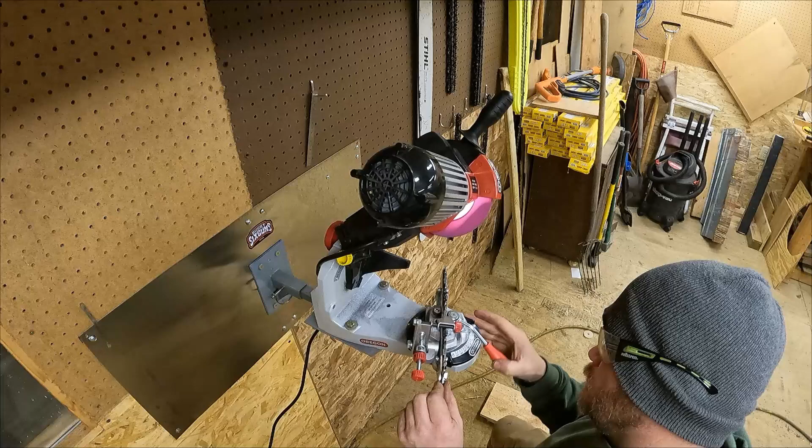So if you're interested in seeing what I think of that, stick around. Like I said in the beginning, this is why I bought this. I'm not going to show you how to sharpen chains. You're going to see some chains being sharpened throughout the video just so you can see the sharpener working. But for the most part, I just want to help somebody that's maybe thinking about buying a power sharpener.

Maybe this will help you in your decisions. So kind of give you a little background. Like most folks, I started out hand filing chains, or I would take them to a local small engine shop, chainsaw dealer, somebody like that, and have them sharpen them for me once it was going to take me too long with a file to fix them back up. You get into some stone or something sometime, hit a piece of metal in a tree.

But eventually, I can't even tell you how long ago it was now, in doing some horse trading with a buddy, I wound up with a Harbor Freight electric chainsaw sharpener, or chain sharpener.

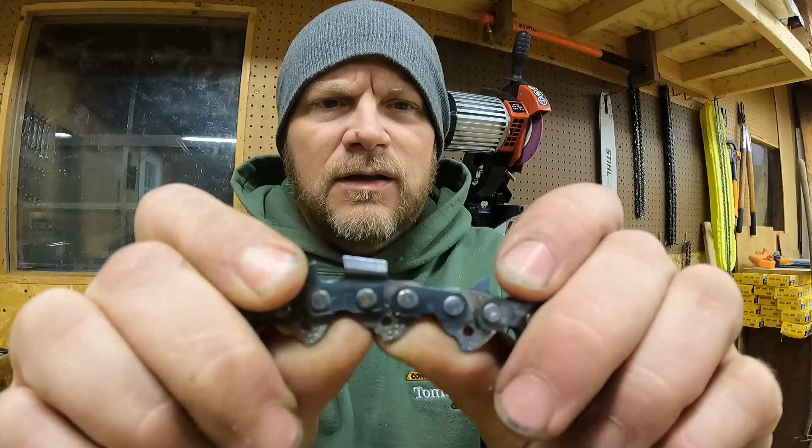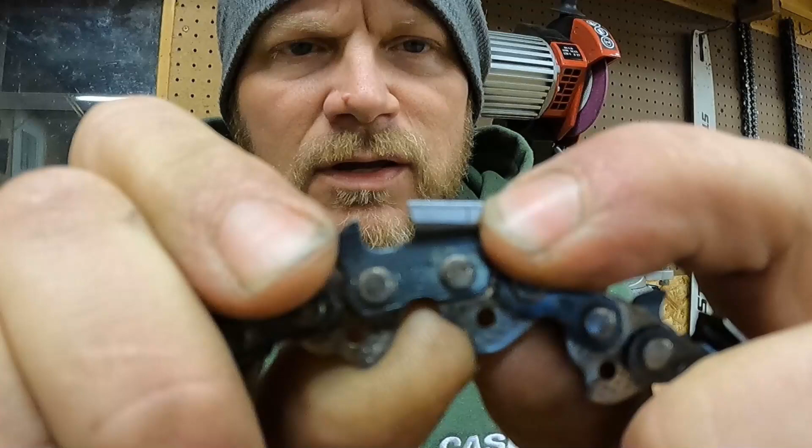Yeah, see if I can see this on here. If you look, there's a little line here on the tooth, and that little line - I run pretty much all full chisel chains, except for my 1/4 inch stuff, that's a Pico. But on all my other stuff, my 325 stuff and 3/8 chains are all full chisel. And if you look, that line there indicates your factory profile and your wear line. So basically once you get back to that far, they're telling you that tooth isn't safe anymore.

Anyways, on that Harbor Freight one, you can't achieve this factory angle. That's because you can't tilt the vise any. This vise here, there's a knob underneath that loosens it so you can swivel the vise to change it between 35 - actually I think it's 40 degrees in either direction. But it also has what they call down angle, so this will actually rock back like that 10 degrees. And by rocking that back that 10 degrees, that's what allows you to maintain that factory angle.

So that was another reason I wanted to go to an Oregon versus that Harbor Freight one that I had. Like I said, I'm quirky that way. I don't know how else to put it. I just want stuff to...

These guys have been making chains a whole lot longer than I've been alive, so they have a better method than I do for doing this. I cut firewood, I'm not a logger, I'm not an arborist, I cut firewood. So this works for them, and I guarantee it's going to work for me, and I like that. But anyway, that's kind of the adjustability of it.

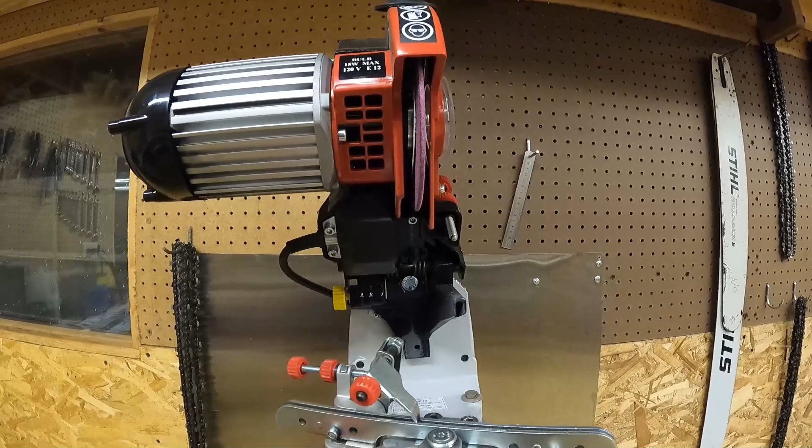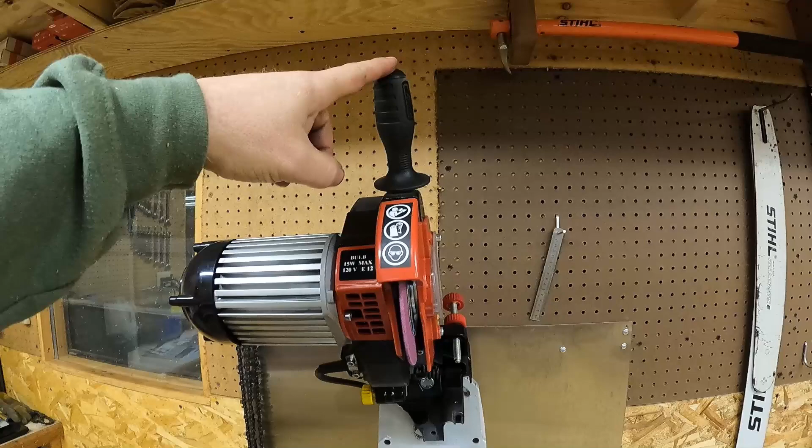What did it come with in the box? So right now, currently I have the 1/8 inch wheel on the sharpener. When you get it in the box, like I said, I've had this for a year now, it is in pieces. So it's basically in a couple of pieces though. The base here is in one piece, and then the head with the motor and stuff on it is in another piece. And then you got to put the handle on it, and you got to put this cover on it.

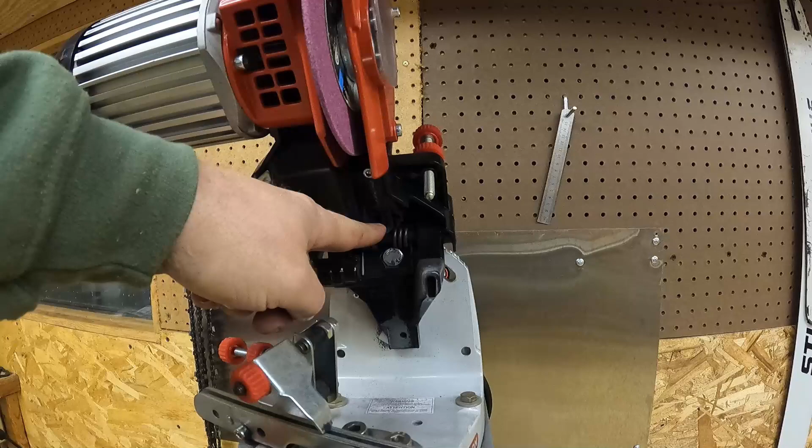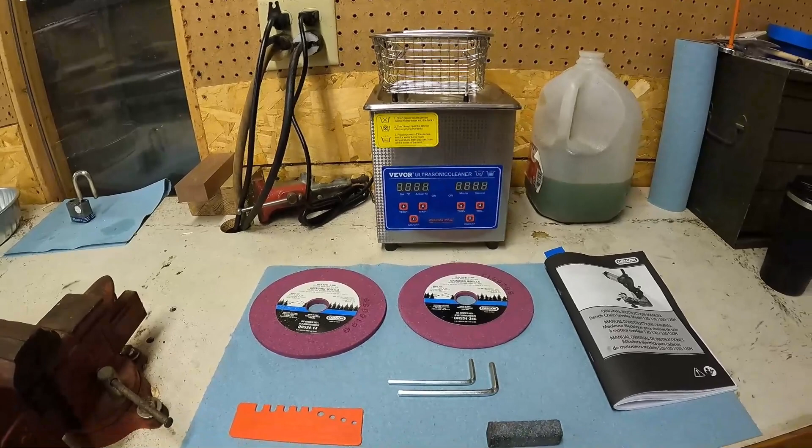But other than that, it's pretty basic, pretty simple to put together, not real complicated. One thing I don't have laid out is it also comes with a spare spring for the head. As a matter of fact, now that I'm talking about it, I'm not even sure where I put it. But what it came with in the box, like I said, I've got the 1/8 inch grinding stone on it. And then it came with a 1/4 inch wheel - this would be the wheel you'd use for grinding rakers. And then it came with a 3/16 grinding stone.

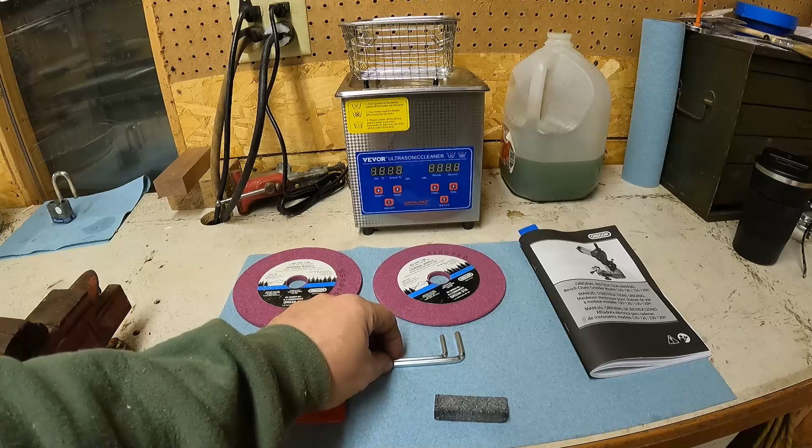Of course, the operator's book, a stone dresser, and two Allen keys. These two Allen keys are what allow you to change out the grinding stones. And then of course it comes with a little gauge, so you can check different stuff on your chain. I mean, there's all kinds of information on it, and the book does a really good job of explaining and showing you how to use the gauge.

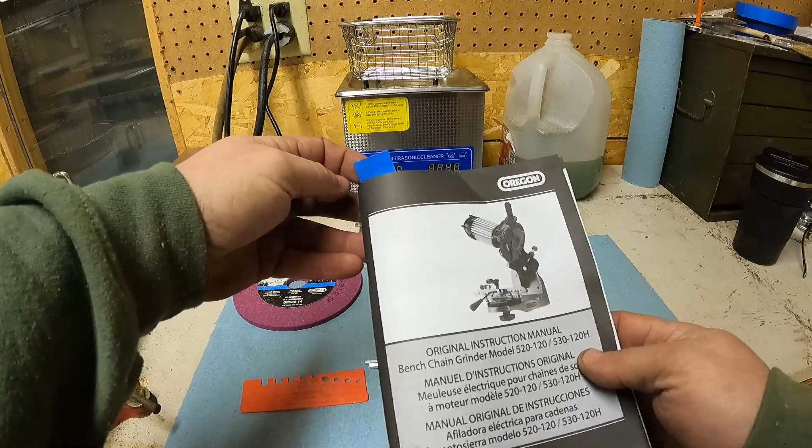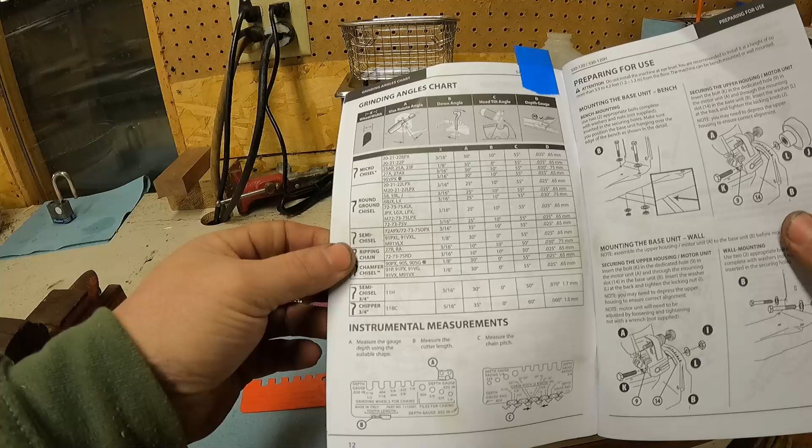And then also, one thing I really liked is, you'll notice I got one page I keep tabbed - they have an excellent chart for setting up the grinder, to show you your vise rotation, down angle if it's needed, the head tilt.

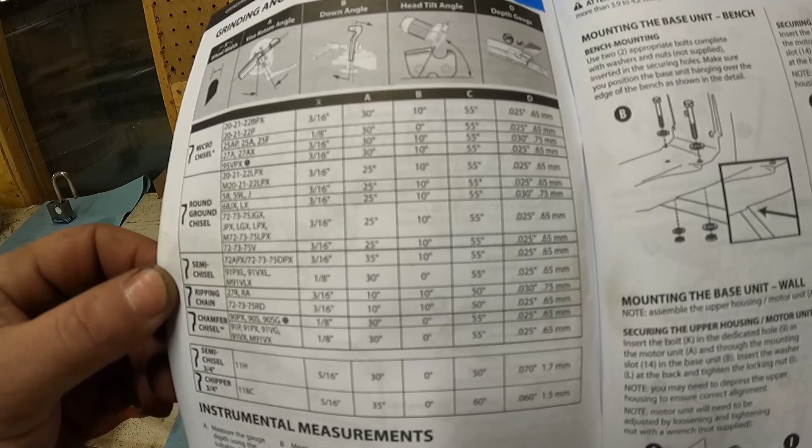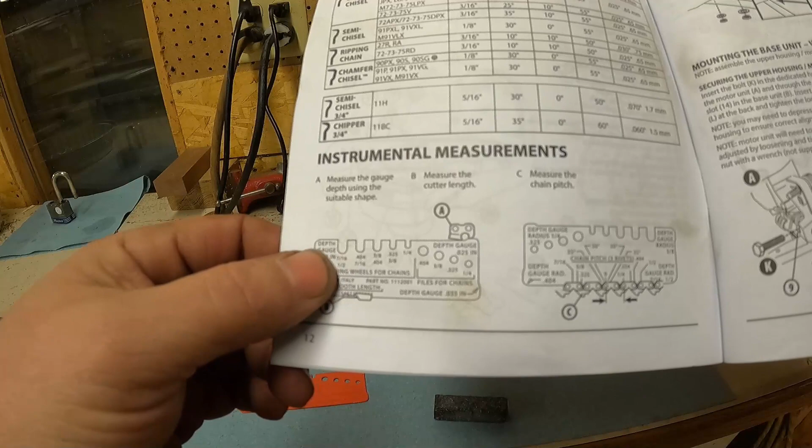Now I will say this - oh, and it also has the thing down here, shows you all the different things you can use on their little gauge. So like if you have a chain you're not sure what size it is, it shows you how to use the gauge here and determine what pitch chain it is. That's really handy, especially if you've never measured that before or don't know how to measure that. So that's definitely a handy thing.

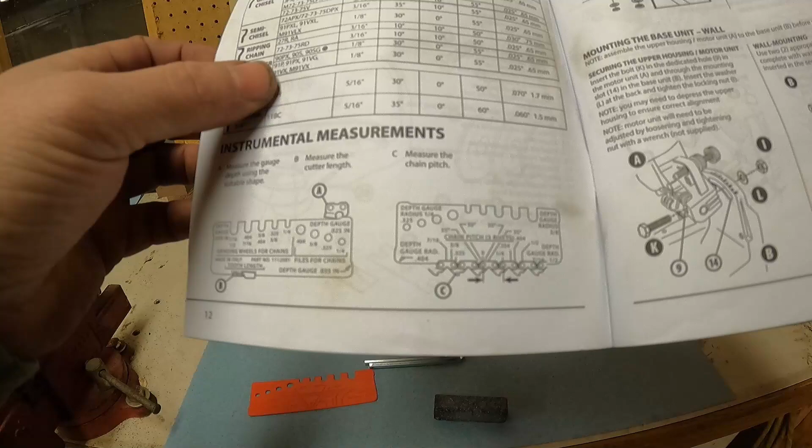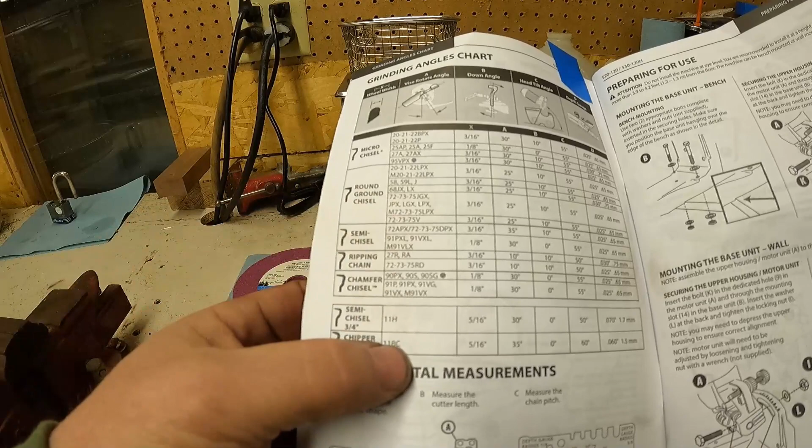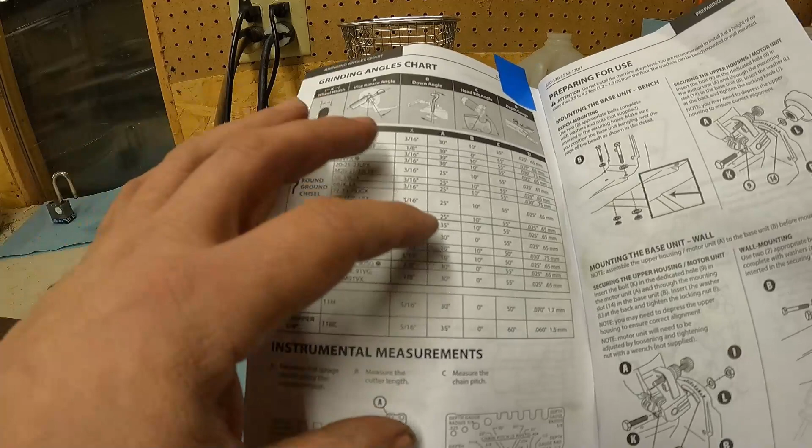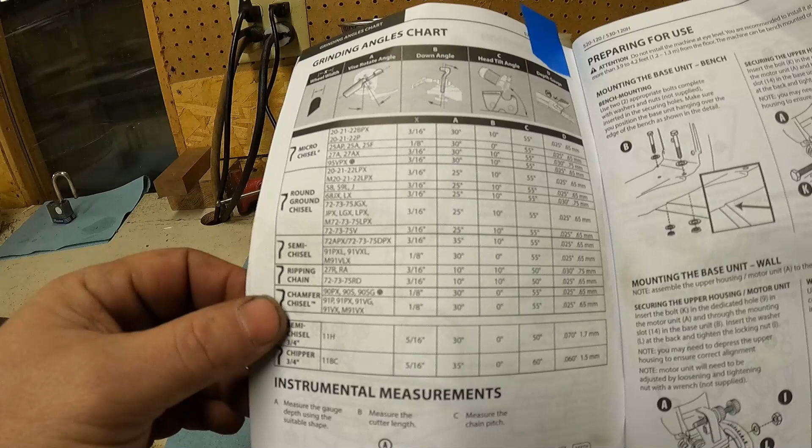What else? Oh, on this chart, the one thing I will say is all these setups are for Oregon chains. These are all Oregon part numbers. So if you're running like a Husqvarna, and I know this is a fact on Stihls, their angles are slightly different. Not a huge difference, but there are some variations there. So that's why I just try to match the factory profile on the chain. And I go off of, like, if I'm running a Stihl chain, I use the information off the Stihl chain box.

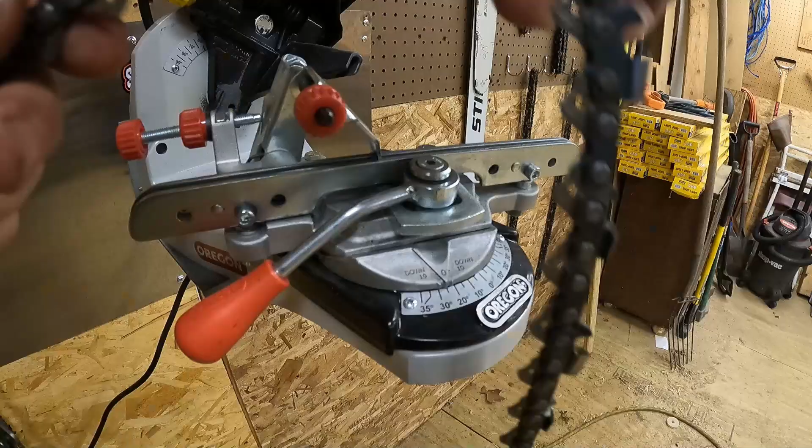Well, there you can kind of see the reasons that I decided to go with the Oregon 520120. I do, even though I don't utilize the adjustability a lot due to the fact that I run the same style chain all the time, I'm glad that I have it. I do occasionally sharpen chains for other people, so that comes in handy when they bring me stuff, because you never know what they're going to show up with.

Another thing, I know that there's a lot of other manufacturers of these that you can buy, and they may be cheaper than the Oregons. I don't even remember what I paid for this thing. I want to say it was $300 and some. Here, as of today on Amazon, let's look - it runs $390.99. And I did order mine off of Amazon.